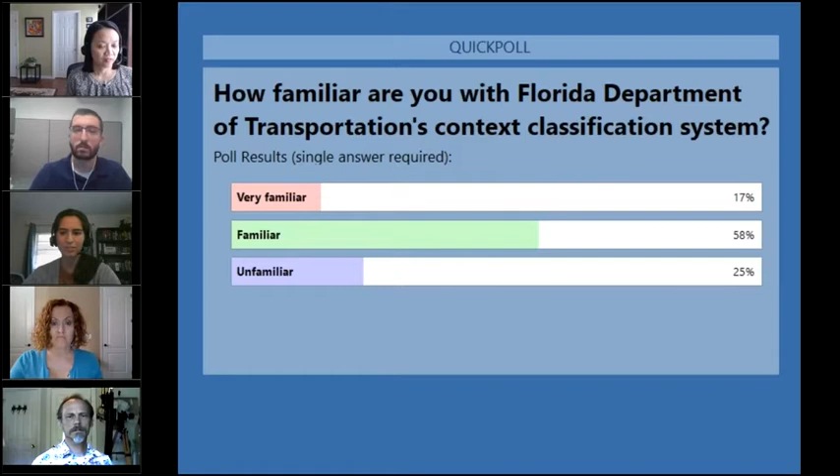Today, you'll be given an overview of FDOT's context classification system. You'll understand how FDOT assigns context classifications to roadways. You'll learn how context classification fits into other FDOT processes, and you'll hear about key context-based design principles that you can apply to your project work.

By the end of this webinar, we hope that you have a stronger understanding of the role that FDOT's context classification system plays in your day-to-day work. Remember that you will be quizzed at the end of today's webinar on 3 new context-based design principles that you learned.

To kick things off, Tina will talk about why we have embarked on the Complete Streets initiative and how context-based design relates to Complete Streets.

Okay, can everyone hear me?

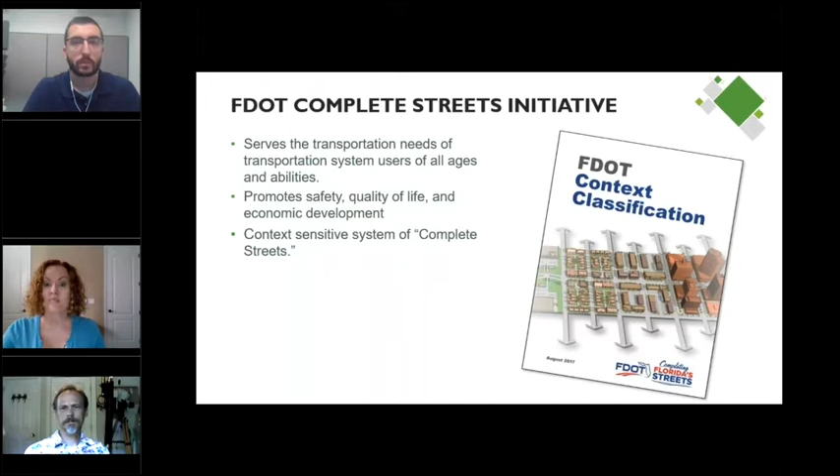Meaning, not all streets are the same, and each one should be designed based on its context. Roadway design should promote safety, quality of life, and align with the economic development goals of our partner agencies.

So now that we know why it is important, next we're going to look more in depth at FDOT's context classifications and briefly explain how we assign or review the classifications for each state road.

The context classification system includes all of the land areas and types found throughout the state of Florida. There are classifications ranging from the most natural wilderness settings to the most populated urbanized areas.

Both the context classification and the transportation characteristics of a roadway, such as the types of access it provides and types of trips it serves, inform us about the roadway users' expected demand and the potential challenges and opportunities users experience on the roadway.

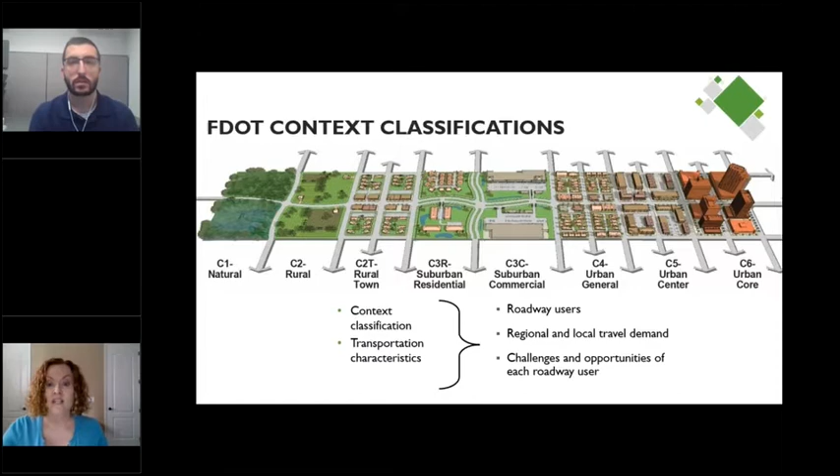For example, in the C6 Urban Core context classification, it is anticipated to have more pedestrians, bicyclists, and transit users than in a C2 Rural context classification, and the roadway design should reflect that.

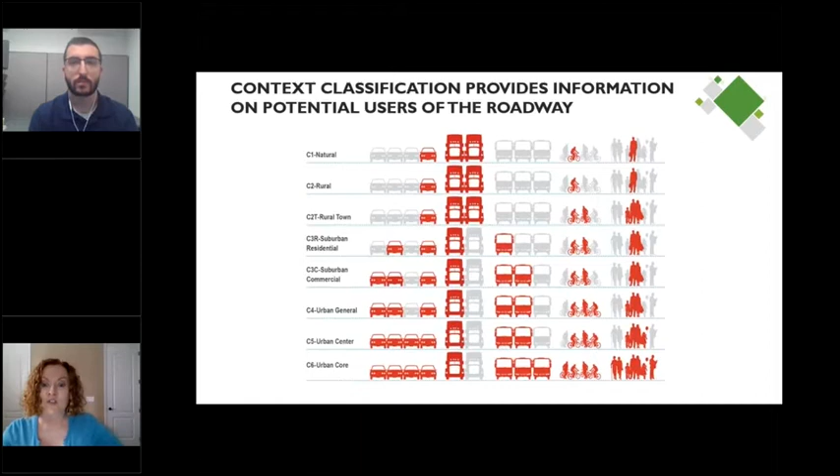Now I'm going to turn the presentation over to Steve Shams to explain the mechanics of how a classification is calculated.

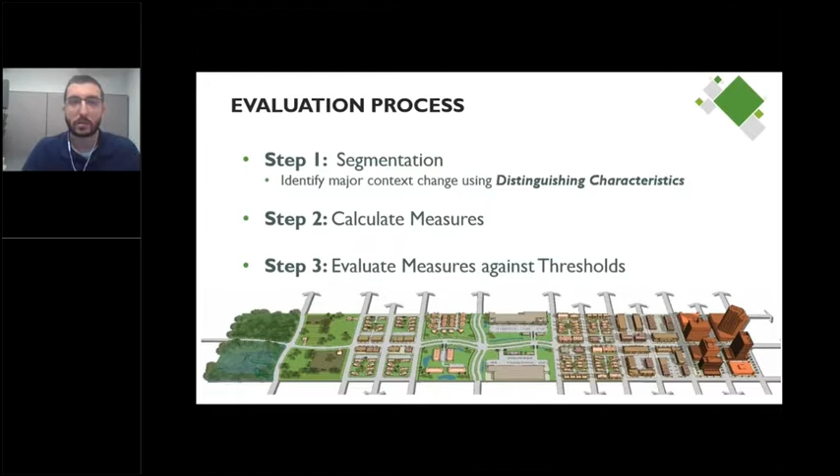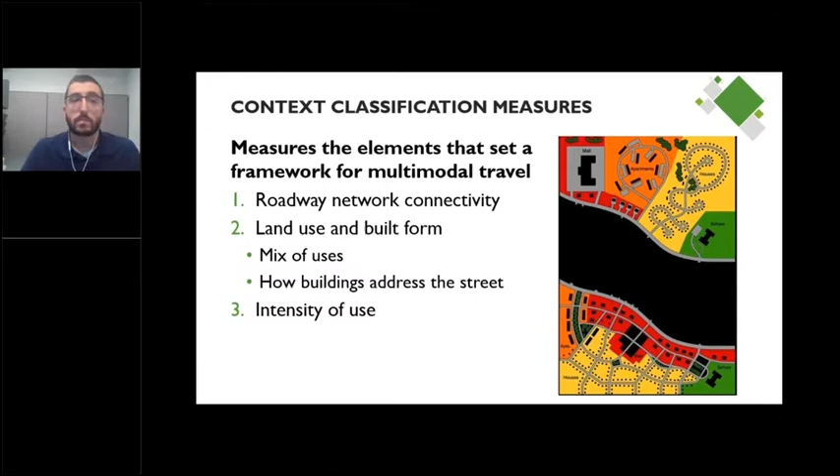So what are these evaluation measures? As Tina mentioned, these measures capture the typical characteristics that indicate the variation in development patterns. These are roadway network connectivity, land use and built form, and the intensity of land uses.

These measures are reflected in this matrix. Now, I'm not going to go over the matrix in detail, but I'd like to point out it is included in the context classification cheat sheet that was emailed in advance, and it is also located in the handouts tab of this webinar.

Each district has developed a district-wide existing context classification for all state roads. This GIS database is a preliminary designation developed through a GIS-driven process.

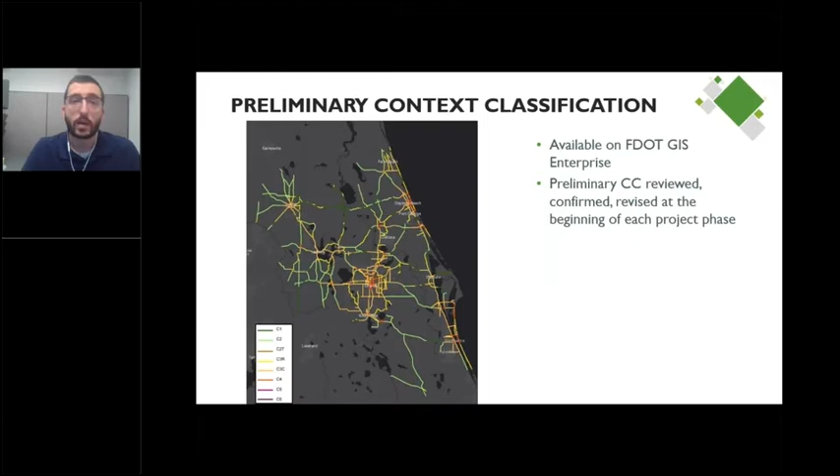Each roadway segment's preliminary classification is reviewed, confirmed, and revised at the beginning of each project phase by FDOT. Now, you might be wondering, what is the difference between an existing classification and a preliminary classification?

Existing context classification considers current conditions as well as permitted developments and program projects. Future context classifications consider all planned future conditions.

These designations are provided for qualifying projects or those that require efficient transportation decision-making, or ETDM, such as PD&E projects and larger projects that may require right-of-way.

The districts also have the discretion to use future context classification on any project they find appropriate.

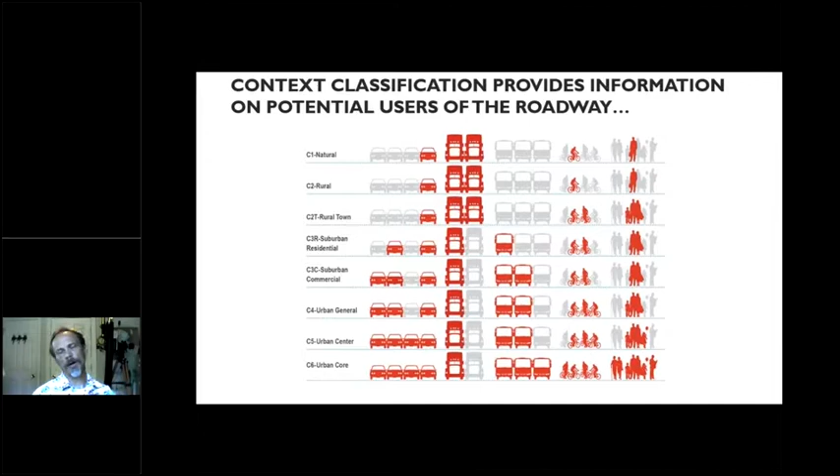Another way we use it, and Tina alluded to this earlier, is that we can tell right away once we've made a context classification designation what kinds of emphasis, modal emphasis, we're likely to have on the roadway and what we're looking for there. Knowing that can help us understand more about how the roadway needs to be designed. Next slide, please.

So here are three of the documents that have already begun to incorporate context classification. We're going to talk quite a bit today about the FDOT Design Manual. We'll also be touching on the Traffic Engineering Manual and the Access Management Guidebook.

Now, if you've never used these books, the FDOT Design Manual is what we use to design the roadway itself. Once the roadway is built, it's got to have traffic signals, pavement markings, intersections. Those things are dealt with in the Traffic Engineering Manual.

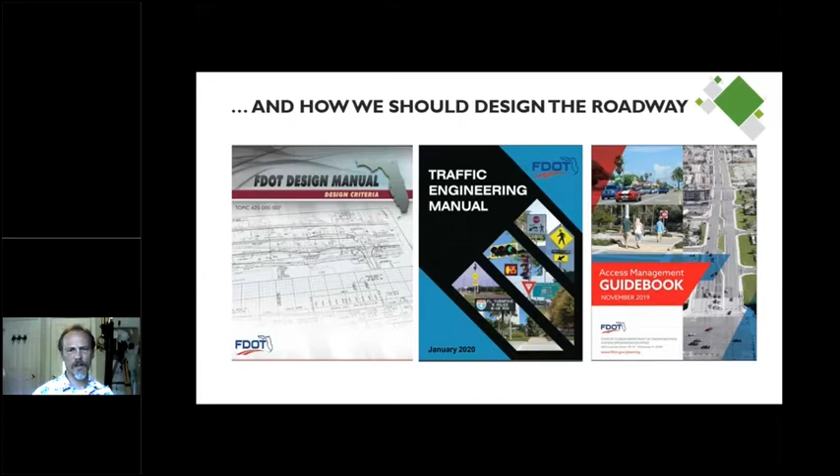And then we also may be looking at how the roadway interacts with things along the roadway, driveways, access to businesses and things like that. That's the Access Management Guidebook. So these are three of the documents that have begun to incorporate context classification in the way we're using it now at the department. Next slide. Okay, thank you.

So here's a little quiz. We're not using the quiz software, so this is one you can just do on your own. What you have here is a picture of four segments, four roadways, and I want you to look and see what the lanes look like, what it looks like along the edges, and assign in your own mind how fast you think these roadways are.

If somebody came to you and said, hey, I need a speed limit on each one of these roadways, what speed limit would you assign based on what you see there? So what do you think is the posted speed in this corridor? I'll give you a few seconds to think about that.

And here's a hint: these are all in the same corridor. Okay, next slide, let's see how we did. You can use the raise your hand function on your control panel if you guessed right for all these speed limits. And what you see is that they're all different speed limits, even though it's basically the same road as it goes through these different areas.

But what happened was in one area, it was a school zone, so the speed had to go down. Another area was still a school zone, had to go down even lower. In between, there may have been some transition areas. But the roadway stayed the same all the way through. And what we find is that drivers don't respond to that very well. They tend to drive the road the way it was designed. If you have to use signs to tell them how to slow down, it may not be as effective. Next slide, please.

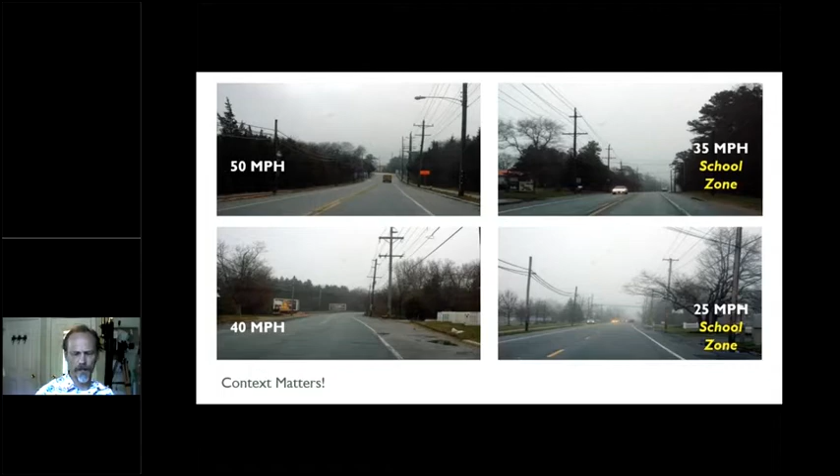When we put the FDOT Design Manual together using context classification, what we're doing is saying, well, for each of these context classifications, what are my different design criteria and how do they need to change? For instance, if you look at that top row that talks about allowable design speed, you'll see that based on the context you're in, certain speeds are open to you and others are not.

So if I'm in a C5 downtown condition, I'm not going to be designing 45, 55 mile an hour roads. On the other hand, if I'm out in the countryside in C1 and C2, that's where my high speed roads belong. By knowing where we are in space with the context classification, we can then assign the criteria that's going to make the most sense.

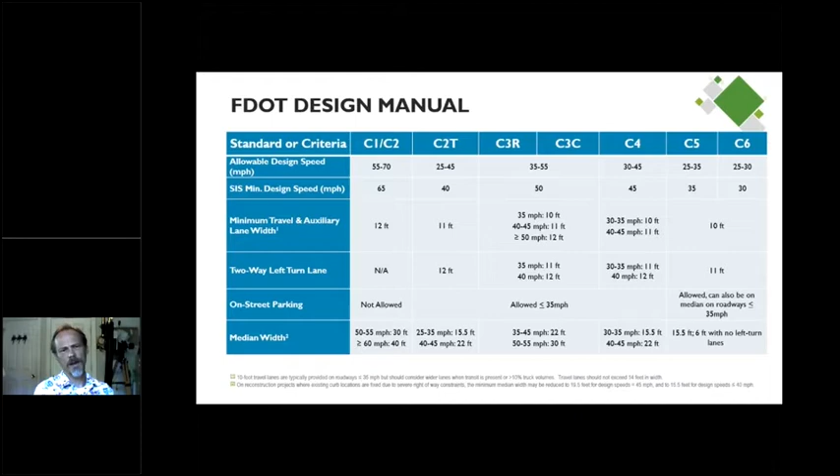You can see other criteria there as well, like lane widths and whether or not there's a left turn lane, whether or not we're expecting to see on-street parking. All these things are covered in the FDM and many more, based around context classification.

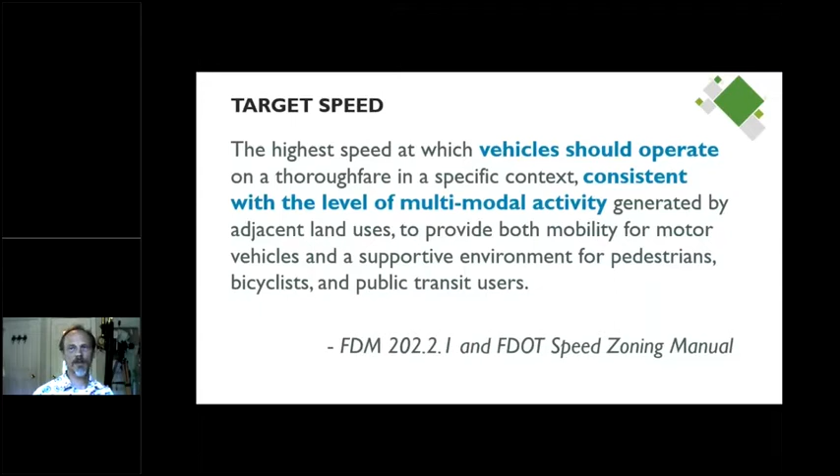One of the concepts we've been able to introduce is something called target speed. Basically, target speed is when everything is all said and done, if you took away the speed limit signs and just let people drive the way they wanted, how fast would we want them to be driving? What is the speed we want them operating at once the project is done? That's a function of how they interact with the land around them.

So in this slide, for instance, the left one, it says you're supposed to be driving at 35. Well, what's telling me it's 35? The road looks pretty open to me — I might feel more comfortable driving faster. So if we really want you to drive at 35, look at the slide on the right.

You can see we've introduced some curvature to the road. There are things to engage you along the side of the road — trees, and in other places maybe buildings. We need to make the roadway reflect the speed that we want you to be driving. That's the idea behind target speed.

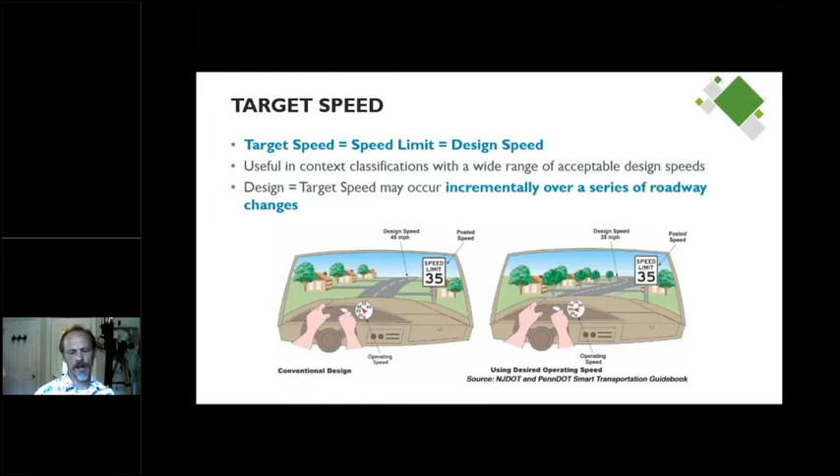We had a problem — I'm sure you remember that slide I showed a minute ago with the FDM criteria. In C4, our general urban context, we have a really wide range of design speeds between 30 and 45 miles an hour. That actually reflects the range of design speeds that exist today in Florida's general urban areas.

But where you would actually be within that range is a little tougher to tell. So one of the things we're introducing is target speed subranges to help you understand, if you're in a C4, how fast you should be driving. We have some different ideas here: for 30 miles an hour, or 35, or 40 to 45, there are different ways you might consider what that speed should be.

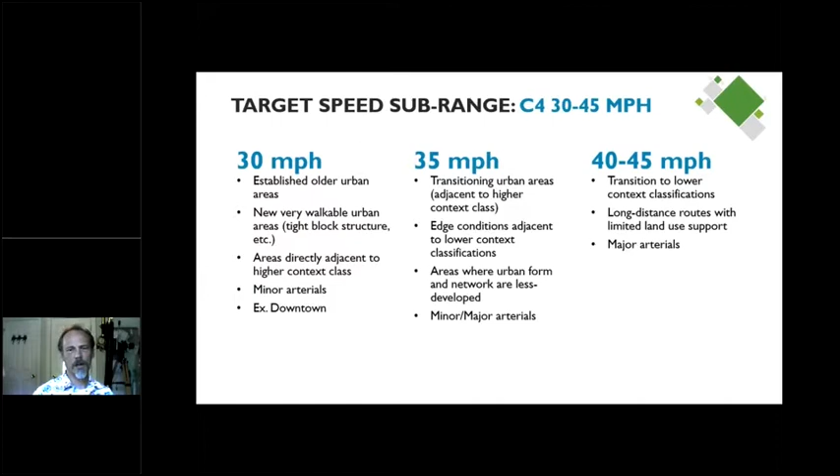The next slide shows that even a little better. Here are some questions we might ask when thinking about setting target speed on a roadway within this range of potential design speeds. What is the context classification? That's always a good place to start. What is the allowable design speed? That gives you the range. What's the access classification?

What's the transportation role of this particular roadway? Is this on the edge of town, just moving people in and out of downtown? Or is it actually in an old neighborhood with a lot of activity going on along it? How is this roadway functioning there? What are our priority users?

And finally, what does our safety data tell us about this roadway? Is it a roadway that perhaps needs to be slowed down a little bit, or one that's working fine with the speed it has? Next slide, please.

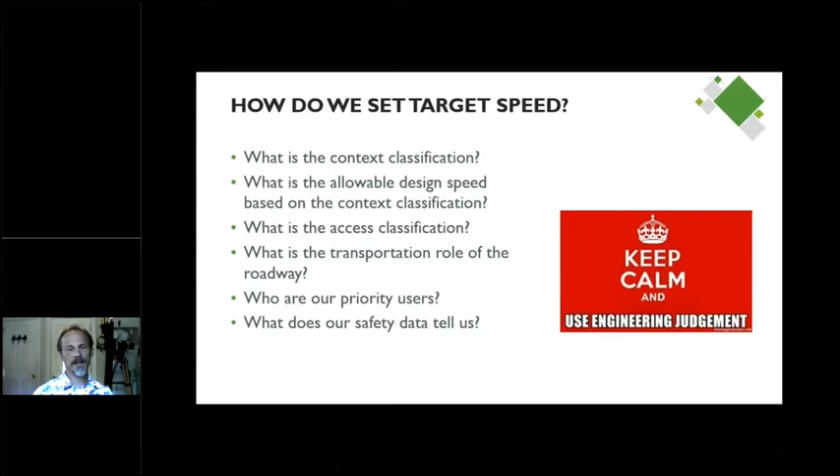So we have a chapter in the FDM, chapter 202, on speed management, and it has examples of different strategies you can use to achieve these different design speeds. One of the things we found when we created the FDM is that we had gotten really good over the last 100 years at building roads fast, but when it came time to build roads slow, we had to teach ourselves how to do that. So that's what FDM 202 is designed to do, to help us figure out what aspects of a roadway make it operate at a particular speed. That's what you'll see in this chapter, and there are some examples here on this slide.

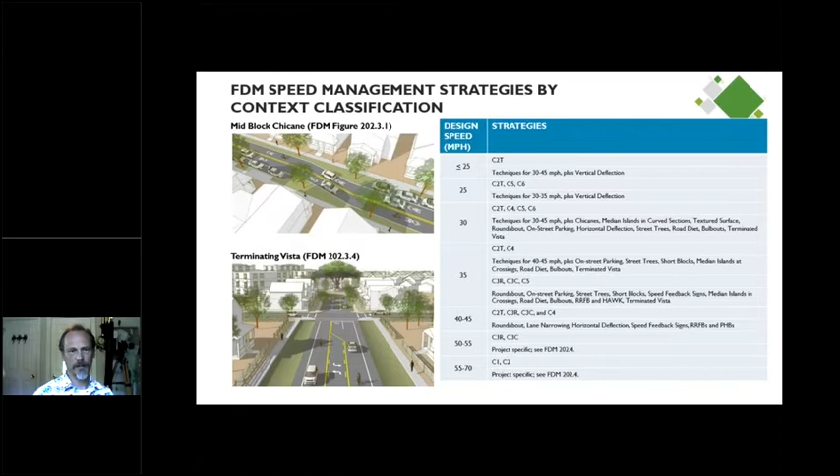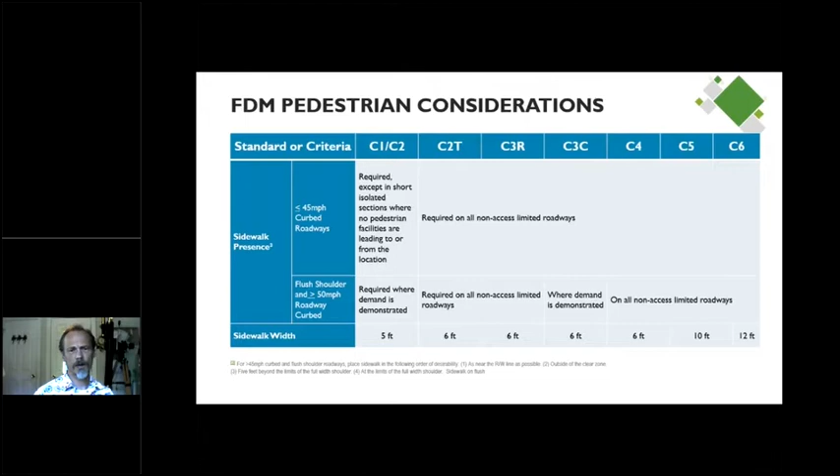One of the things we provide for in complete streets is pedestrians. We have a whole range of users, obviously, in complete streets. Within the FDM, pedestrian considerations are also broken out by context classification. We know that as our context class gets higher, from C1 to C6, we can expect to see more pedestrians on the roadway. So how is that reflected in our criteria? When you look at sidewalk width, you can see the width actually goes up, though it's not shown directly here — it's in a small footnote. In C4 and C5, there may be reason to go even to an 8-foot sidewalk if you expect more pedestrians, or if you have trees included along the sidewalk. So as the context class goes up, the sidewalk gets bigger.

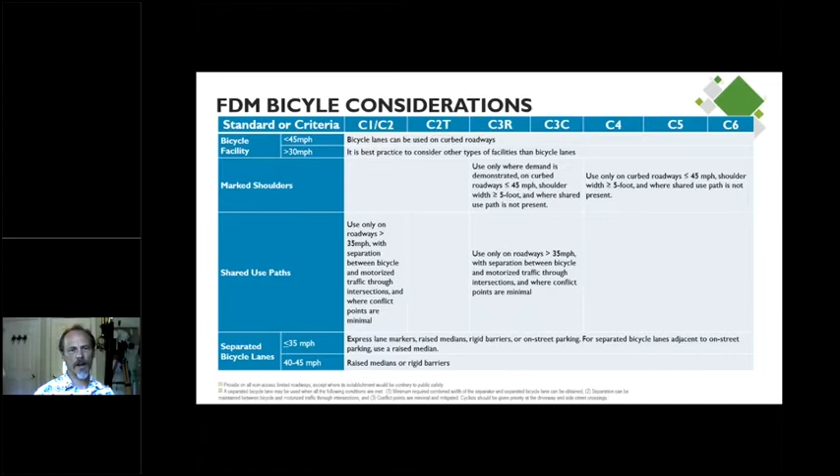For bicyclists, we have a similar set of criteria based on context classification. It's actually a lot more complex than this, and we'll talk about that later — how the bicycle criteria change based on context classification. Whether or not you can use a bike lane, or whether you want to try a shared use path, gets into speed, which is related to context class, so they all kind of blend together.

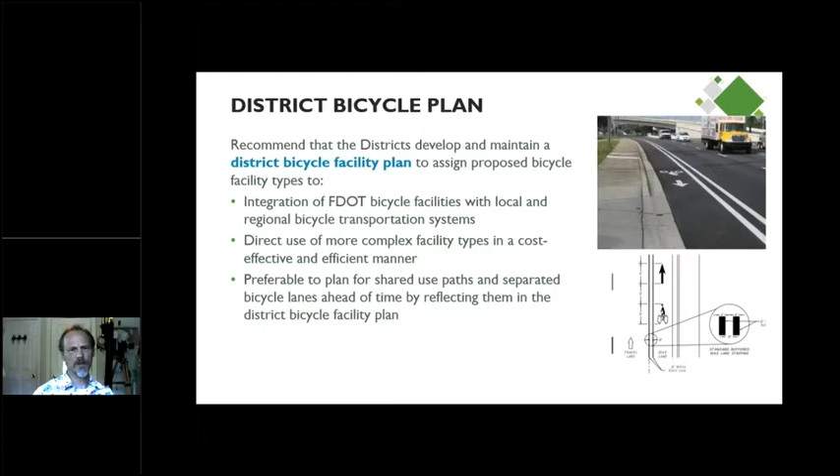If you're in an FDOT district, or even if you're not, you should be aware of one thing we introduced last year: the concept of a district bicycle plan. It's not a requirement, but it's strongly recommended given the complexity and expense of the new bike facilities being introduced at the national level and by FDOT. We need to plan for them better than we have — we can't just say it's going to be a bike lane and call it good. So we're recommending districts prepare a district bicycle facilities plan to help figure out where these more complex types of bike facilities would go.

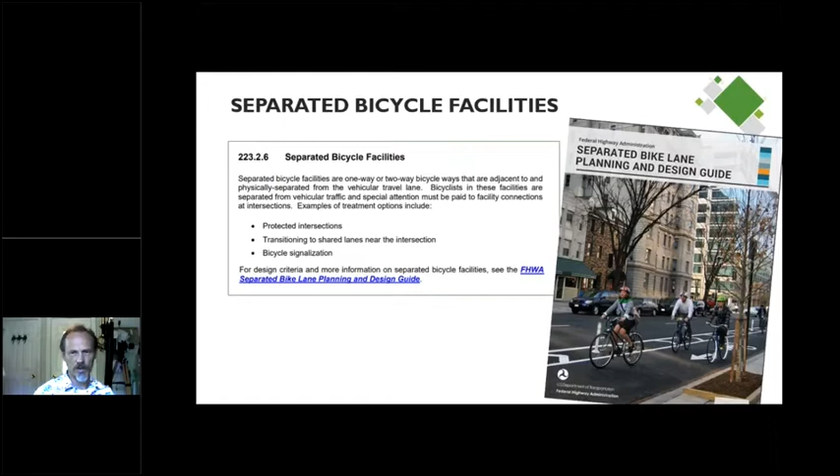A good example is these separated bicycle facilities you see here — this is from the FHWA guide that came out a few years ago. We took this information, which is fairly broad, and last year pulled out the pieces we knew were a slam dunk on the state roadway system and put them in the FDM. There may still be things in the guide you'd like to use that aren't in the FDM — that doesn't necessarily mean you can't use them, it just means we need to talk about it first. But the stuff we knew we could use right away, we put in the FDM. You can go out and use it tomorrow. So that's the good thing about that.

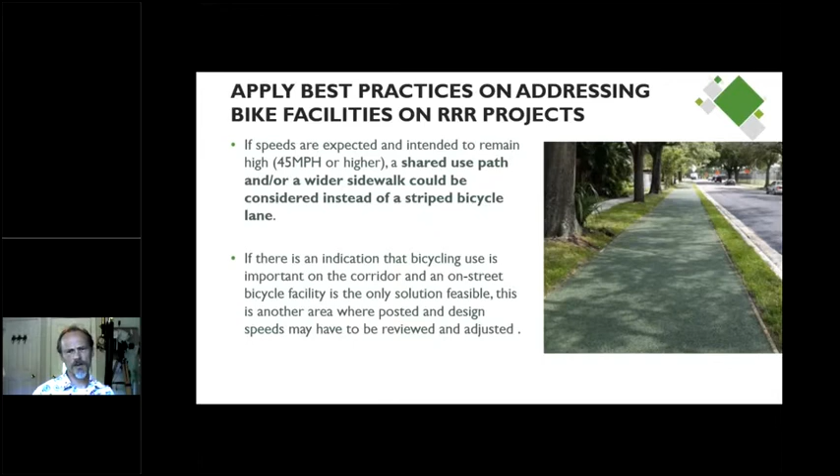Another thing we did last year was make it possible to take some of the bike lane space, which a lot of folks are finding isn't used very much, and put that space into a shared use path within the FDOT right of way. So where we would have had a bike lane and a sidewalk next to each other, we can now combine that into this shared use path. Here's an example of where you might do something like that. It's mostly intended for our higher speed, more suburban type facilities, but there are other places you might be able to do that.

Just to touch briefly on some of the other manuals that we have incorporated context classification. Here's an example of one for the FDOT Traffic Engineering Manual. This was something that changed just in the past year.

When you want to install a marked crosswalk at a mid-block location, or even at an intersection, it used to be that there was a pedestrian volume that you had to account for before you could even go through the analysis process. What we've done now is said, well, we know that if we're in C2T, C4, C5, or C6, we know that we're going to have a lot of pedestrians there. So if the speeds are already low enough, 35 or less, we don't need to worry so much about that pedestrian volume.

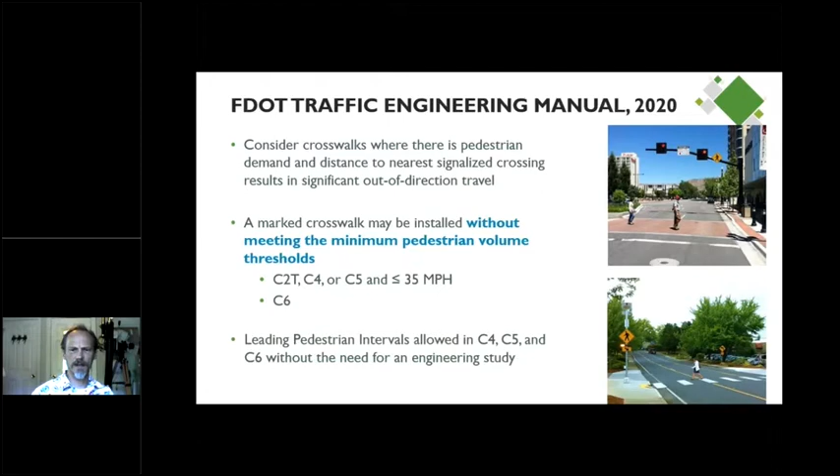Let's just go ahead and assume that they're there. You have to do the rest of the analysis, but based on context classification, you can just answer that pedestrian volume requirement and go ahead and proceed with the analysis to see if it will work just based on the other parameters. Another example is leading pedestrian interval, which is also allowed in certain context classifications.

The access management guide was updated last year. It also has information in there on modal emphasis. So you decide as you're doing access management, if you're doing it more for trucks or more for pedestrians or more for transit, it will affect what kind of access management tools you use. And so we've now incorporated context classification in there as well.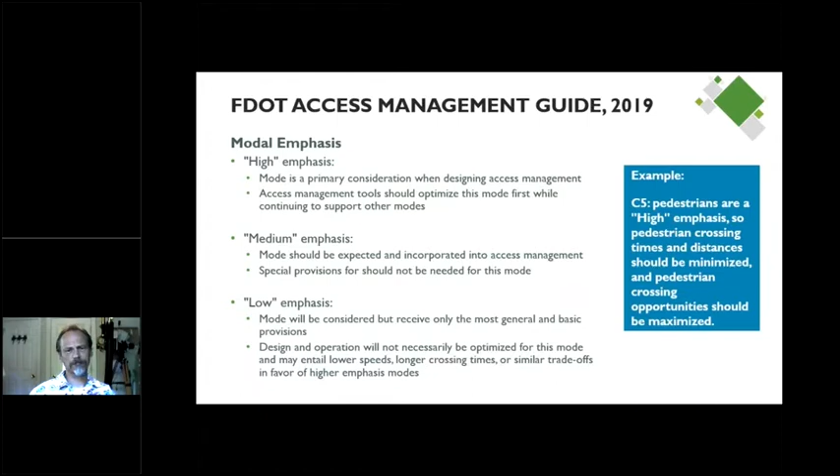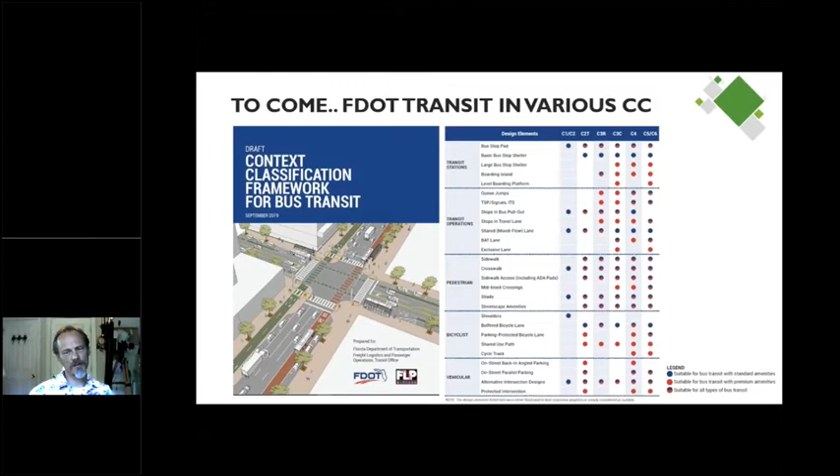And still to come, this is in the works, an FDOT transit-based framework for context classification for transit. And again, based on where you are in space on your context classification, it'll help you figure out what kinds of transit facilities might or might not be appropriate in those locations.

Okay. And that gets us down to our next speaker. Great. Thanks, Dwayne. Hello, everyone. My name is Jane Lim Yap. I'm with Kittelson & Associates.

So we're going to zoom out a little bit and talk about some higher level principles now that you've seen the policies and regulations and standards that are reflective of context-based design. It's good to really just understand the principles behind this also. Main objective of today's webinar is to deepen our understanding on this principle. So spoiler alert, we will ask you at the end of this webinar on these principles. So as you go through it, you can listen for these principles.

So we wanted to talk about our land use and transportation story, as this is key to complete streets. We are excited today to see the participation from both our land use and transportation partners. And so it is a story that really is part of a lot of the evolution of our communities.

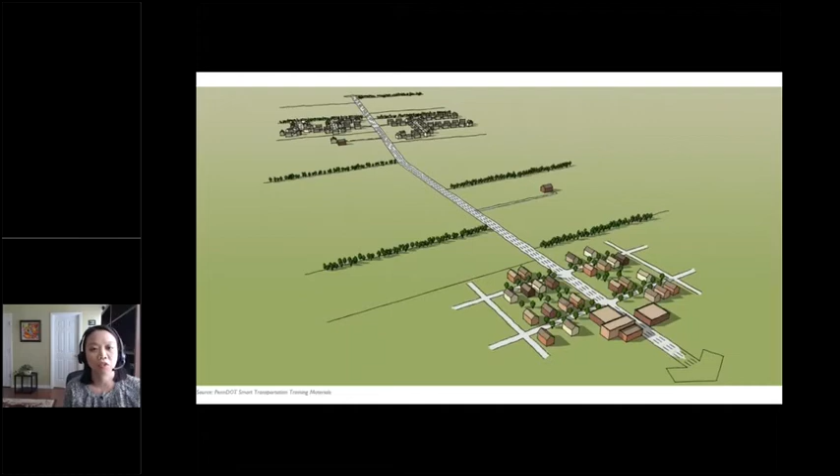The story usually starts with this typical cycle, which is here we have a historic village on the lower right, surrounded by farmlands on a 2-lane roadway. A couple of farmers could apply for rezoning and redevelop their farmlands into residential subdivisions. As this happens, the commute between the village area and the new subdivision would lead to higher levels of volume and potentially some congestion on the state roadway.

So DOT is called and asked to come and widen the roadway to accommodate this new traffic. After the road is widened, land values along the roadway would increase. A couple more farmers now go and ask for rezoning to potentially commercial land uses. And you'll hear this argument of, DOT just invested in this roadway, we would like to take advantage of this investment by increasing our tax base and converting our ag lands to commercial development. Now the level of congestion is going to further increase, and DOT has to widen the road again.

And notice that the historic village now, it may not be as quaint anymore with the context changes around it. So the remaining farmers probably now have a huge economic incentive to sell their land for development. The land values are too high because of access to this 6-lane roadway, and for it to continue as agriculture probably doesn't make too much sense for them.

So at the end, we eventually hit this cycle, and this is the road we have. This is familiar to many of us. We see it everywhere. All of the land uses and development rely on the state arterial for access and mobility, short or long trips, and no parallel roadways were built. We see it everywhere, but this particular example is in Burlington County, New Jersey.

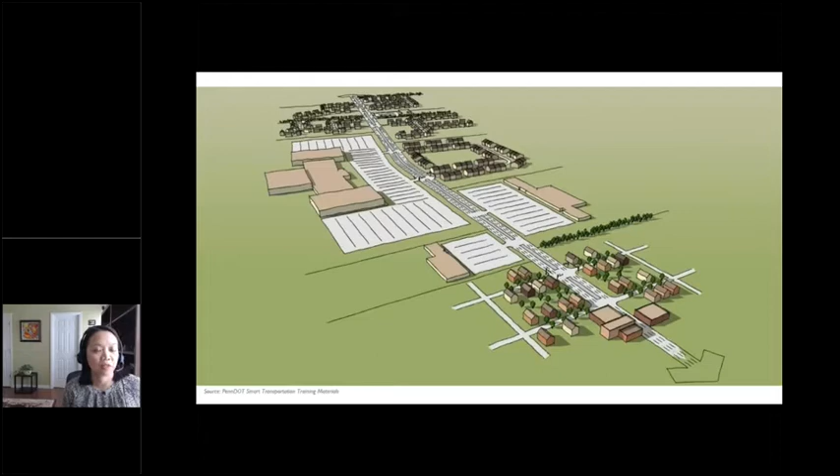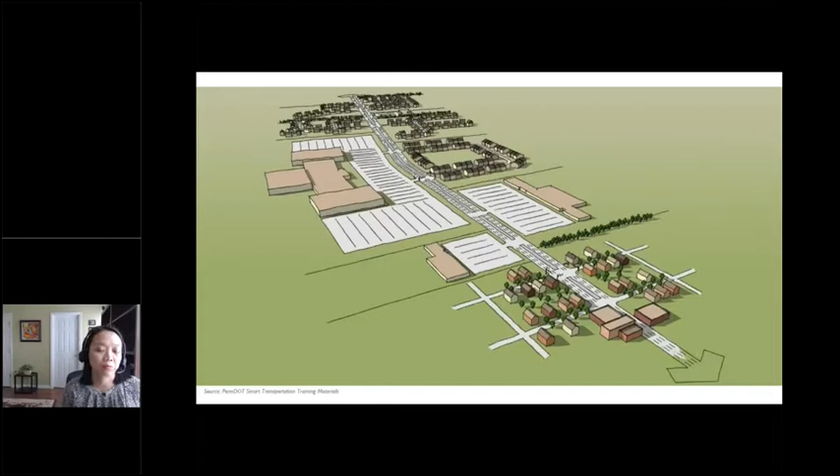And land use is also part of the solution. So perhaps we extend the idea of the village concept with some mix of land uses, some variations in density and infill development. And this would obviously require serious land use guidelines and potentially some policy changes, as well as commitment from various partners, including landowners.

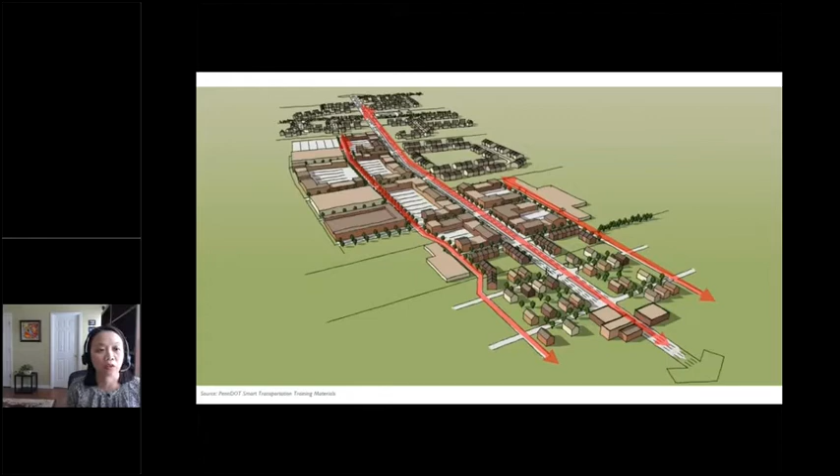So Complete Streets is about putting the right street in the right place, but it is also about putting the right place to frame the right street. This is the first tenet of Complete Streets: it's not just about transportation, but it is about land use and transportation together.

The second tenet of Complete Streets is about building a system of streets, going from complete streets to thinking about complete networks to complete communities. DOT and our partners can work together to build a system of context-sensitive streets. The roadways that DOT owns or has jurisdiction over, which DOT can directly redesign, are part of a broader network of state and local roadways. So no single street can perfectly meet the needs of every user, but over a network of complete streets, the effective network can serve the needs of all users in the community.

Speaking of addressing needs for all users, it would be good to ask, who are these users that we're talking about? Context-based design asks us to consider the design user, and it varies based on the mode and by the age and ability. If we design for the most vulnerable among the users, we will likely be able to cater to most of the other less vulnerable users. And as all trips start and end with walking or bicycling, I'd like to cover in the next series of slides some context-based design principles that are specific to walking and bicycling.

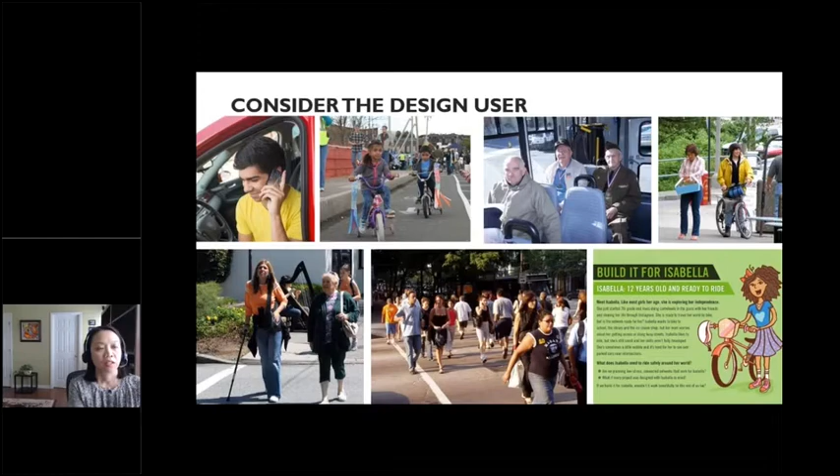So first, what are the fundamental needs for all users? No matter the mode, the fundamental needs for all users include being safe along the trip, feeling safe, and being able to complete their entire trip safely and comfortably. The design elements that help meet these fundamental needs vary based on the design user. For instance, people walking and bicycling are sensitive to the details of the environment, including detours, lighting, pavement surface quality, and more. Transit users do not just experience the transit vehicle itself or being inside the bus; we also experience conditions at the transit station and, of course, the last mile connection to our final destinations.

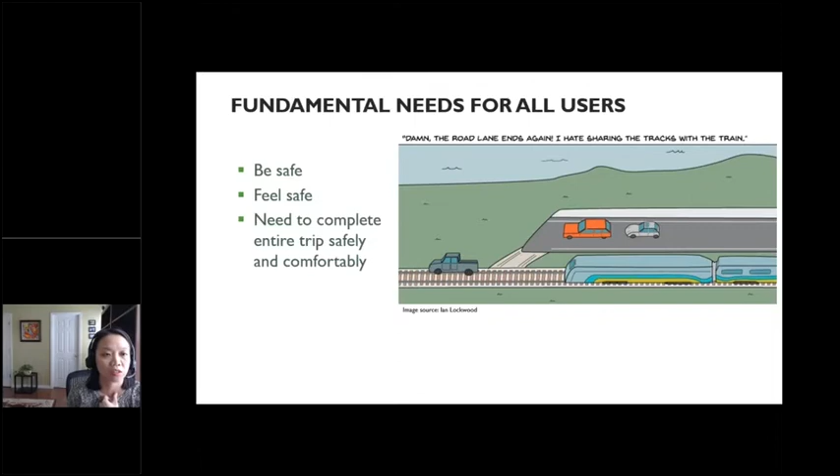So why are walking and bicycling trips so important? Because they're so significant, we can really move the needle if we can influence these trips. It turns out that many of our trips, up to 78% of them, are less than 3 miles and could actually be completed by walking or bicycling if you just think about the distance. But this is not happening, and the reason is the right infrastructure is not consistently available to support this travel. So today, although 78% of our trips are 3 miles or less, 70% of those, a subset which are the 1 mile or less trips, are actually made by driving.

So when we talk about designing the right infrastructure, what makes a comfortable street? Designing for pedestrians doesn't end at the curb or even at the sidewalk. Pedestrian infrastructure that makes a walkable street includes wide sidewalks, typically buffered from the roadway. If the street is in a retail area, a zone for dining or outdoor retailing may be there. There's a lot of elements beyond just the pavement or the sidewalk itself that really contribute to the walkability of a roadway. Again, this depends on the context, and in a commercial retail area context, some C4, C5, C6 environment, this would be appropriate.

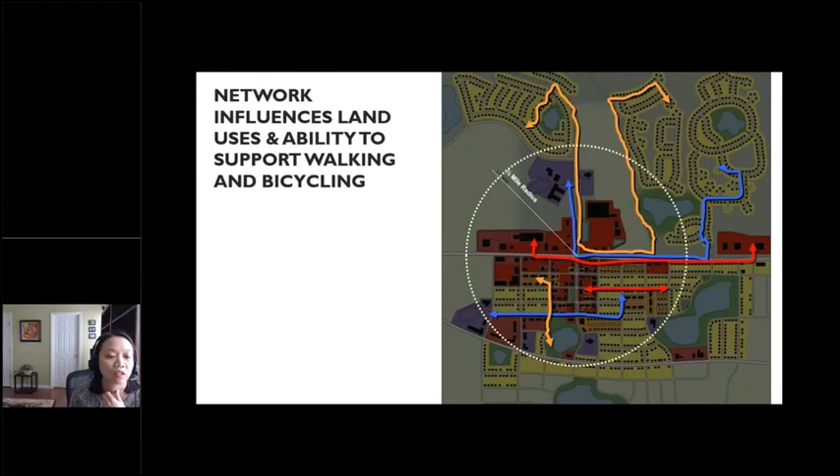The street network on the south side is characterized by shorter connected blocks and diverse land uses. This translates to what trips could occur. Trips between land uses on the south side could be much shorter and more efficient for traveling by all modes, including walking. This circle shows the half-mile radius in an area, and you can see the greater reach of land uses that could be effectively reached by those shorter trips, versus a different pattern and network situation on the north side.

So if we have our land uses set up right, and we have the network of streets, what other barriers could hinder a place from being walkable? Again, we'd like to engage you on a polling question. What do you think is the top challenge of walkability?

Most of you answered presence or absence of pedestrian facilities as a barrier to walkability. Second top answer is vehicle speed, and vehicle volume and presence or absence of street trees were also good answers.

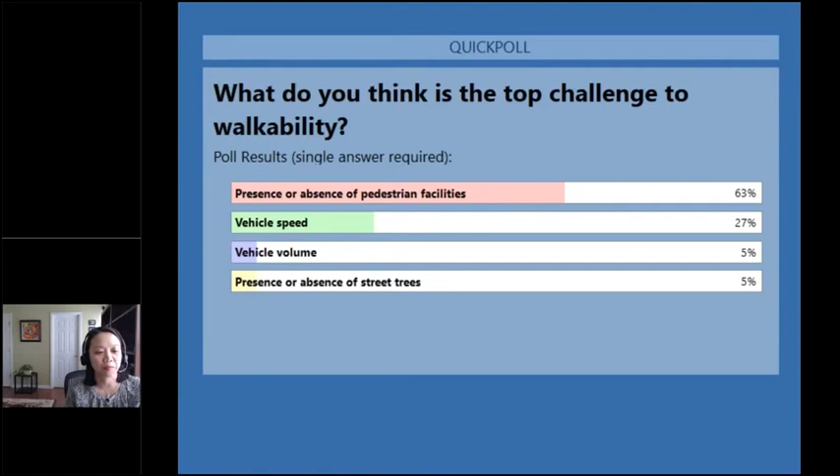We think vehicle speed is definitely an influence on walkability. Why? It's mostly a matter of physics - force equals mass times acceleration - so the faster the speed, the bigger the impact and risk to pedestrians. For instance, the likelihood that a pedestrian could survive being struck by a vehicle decreases dramatically if the vehicle is traveling at a higher speed.

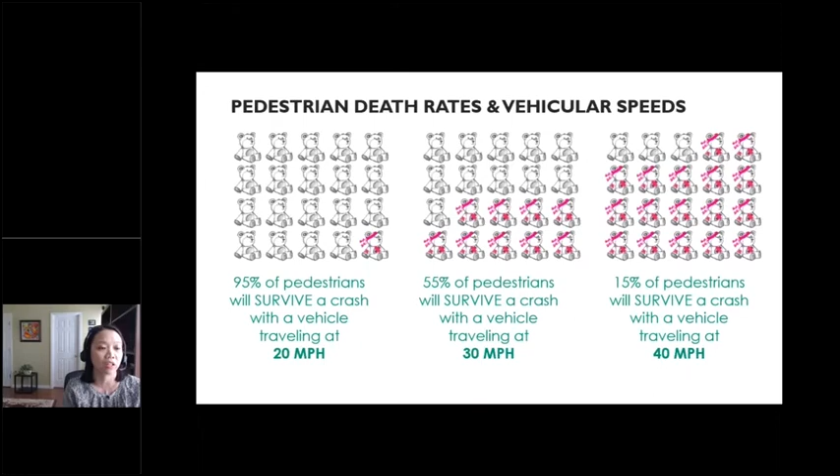Second top challenge to walkability - guess what? We think it's also vehicle speed. Why? If we have our land uses set up right and a network of streets, at lower speeds, say 15 to 20 miles per hour, drivers are better able to assess their surroundings and identify pedestrians and land uses along the roadway. When traveling faster, this idea of the driver's cone of vision means they're focusing on a farther distance and likely not on areas around them. So a pedestrian walking in front of you isn't something one would focus on when traveling at a faster speed.

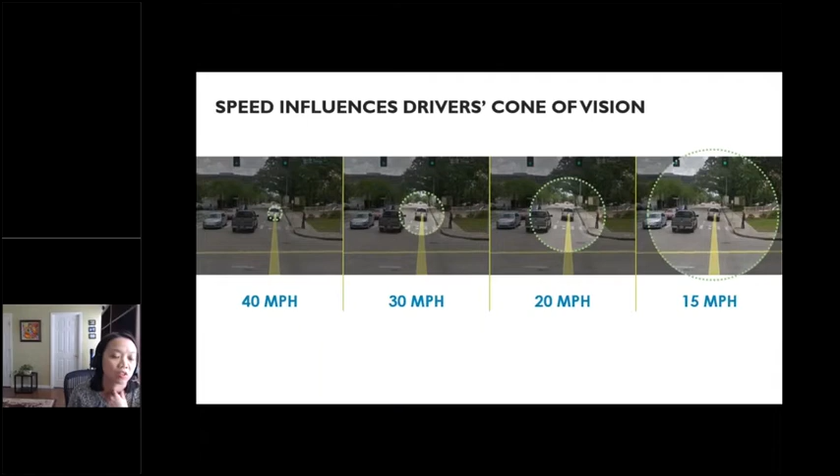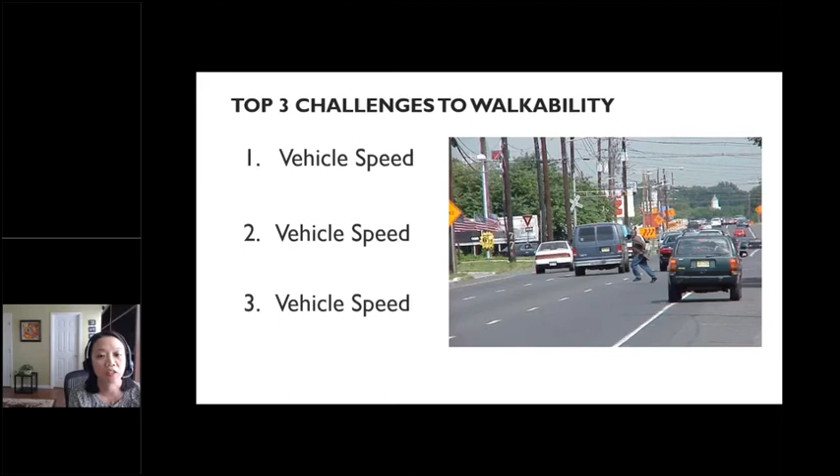So what else is a challenge to walkability? If you guess vehicle speed, that's right again. Vehicle speed of a roadway influences the land use and transportation relationship we talked about earlier - it influences the type of land uses encouraged along a roadway. Faster speeds, because of that cone of vision, will likely encourage destinations set back farther from the street, since drivers have a narrower cone of vision and are focusing on a smaller area. So you get single-use development set back from the street, meaning land uses that would actually be a destination for walking won't likely be present on a roadway with fast speeds. It comes back to that connection between land use and speed.

But there is one more challenge to walkability, aside from everything you all said already. The fourth one, we think, is roadway width. We know that speed-related challenges to walkability increase as roadway width increases, and we need to think about walking along the corridor. But since all of our trips require us to cross the street, we should also recognize the permeability, or crossability, of a corridor as an important factor.

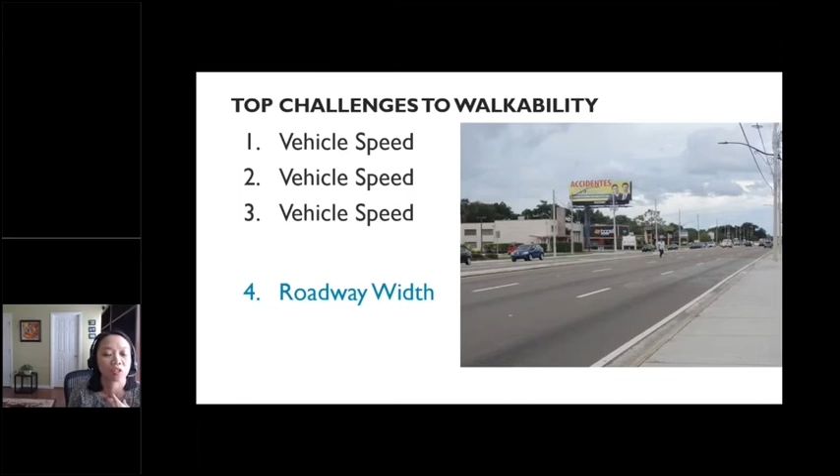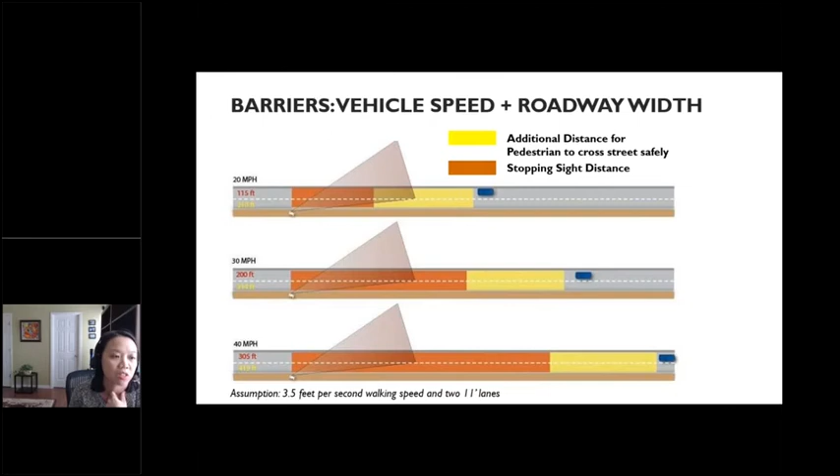So now I'd like to turn it over to Stephen to share more about context-based design, about how these principles could be applied, and examples of how we've applied these principles to some recent FDOT projects. Perfect. Afternoon, everybody.

Along with considering the speed and width of roadways, it's also important to pay close attention to areas where we have high potential for conflicts, like at intersections, where vehicles and pedestrians come together in one singular location. This is where we see the highest incidence of pedestrian and cyclist injuries. So intersection designs that follow the five principles we have on the screen here provide a safer and more comfortable environment for roadway users.

Moving from left to right, we want to make sure our intersections are as compact as possible. A lot of times people think they need large intersections to move a large amount of vehicles or larger size vehicles, and that's not always true. There are ways we can really shrink down those intersection types and introduce new elements to at least make them appear smaller. That's really going to help us manage speeds and remove excessive space that's not necessarily needed, which could lead to driver error.

Then in urban context classifications, intersections exist in a grid. So if one intersection is congested, we need to make sure people are seeking alternative circulation in the network before simply widening out or improving that intersection.

And then integrating time and space. Signal retiming offers a lot of opportunities to minimize wait time for everyone using the signal, whether you're doing shorter signal cycles, shorter crossings, or shared green times. We have a lot of options when we start integrating these signals with each other.

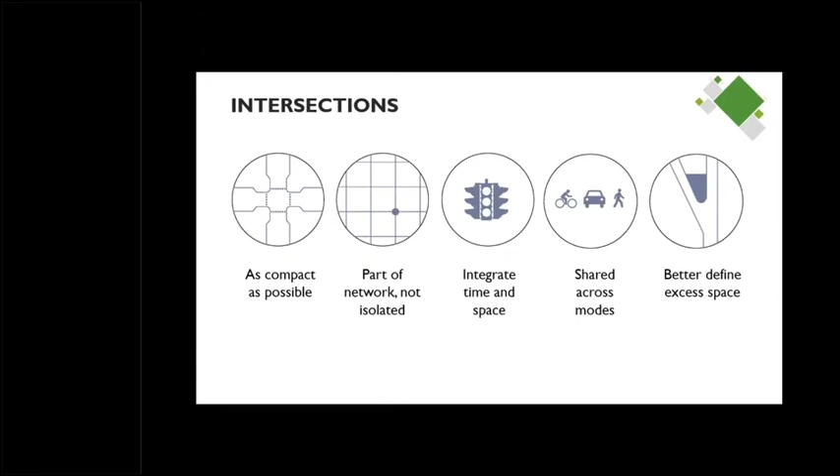And then one of my favorites is actually better defining the excess space. There's a lot of extra room you don't always realize is extra room out there, and that's something we're going to explore here in just a few minutes. Recognizing that is the first step—that this space doesn't actually need to be here, and it's going to widen my view shed and make me feel as a driver that I could drive faster through this intersection than I really need to be and than I should be.

So next we're going to move on to design vehicle versus control vehicle. This is really one of the most exciting things that have come out of the Complete Streets initiative, at least for me as an engineer. A design vehicle is someone who is a frequent user of a given street—on a daily basis, we're driving through this particular intersection or street. It's going to dictate the minimum turning radius.

So if I want to make a turn at an intersection, I need to make sure my design vehicle can make that turn from the lane they're driving in into the immediate turn lane. I should be able to turn into the receiving lane that's nearest to me.

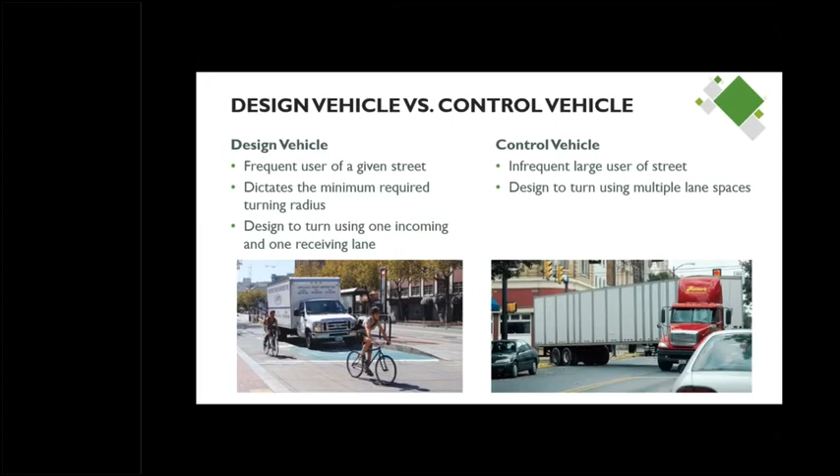A control vehicle, though, doesn't necessarily need to turn into the nearest lane. If it's a 4-lane road you're turning onto, maybe they go into the inside lane a little bit to make that turn. Maybe what you're able to do is like this truck you're seeing here on the right-hand side—maybe you enter the opposing lanes. The important thing to remember with a control vehicle is it's a vehicle that may be visiting or making this turn once or twice a day. There's a different threshold depending on the site-specific constraints and what your origin-destination points are for that control vehicle, so it's just some of those things you need to keep in mind. This is the outcome, though—what you're seeing right here, this curb radius.

So the lighter concrete that you're seeing, that's the concrete that we were able to add to this intersection because we actually designed it for the control vehicle and a smaller design vehicle. So we were able to really shrink up the radial return. That leads to slower turning vehicle speeds. It significantly reduces the crossing distance for pedestrians, and it's going to add to the visibility of the pedestrians.

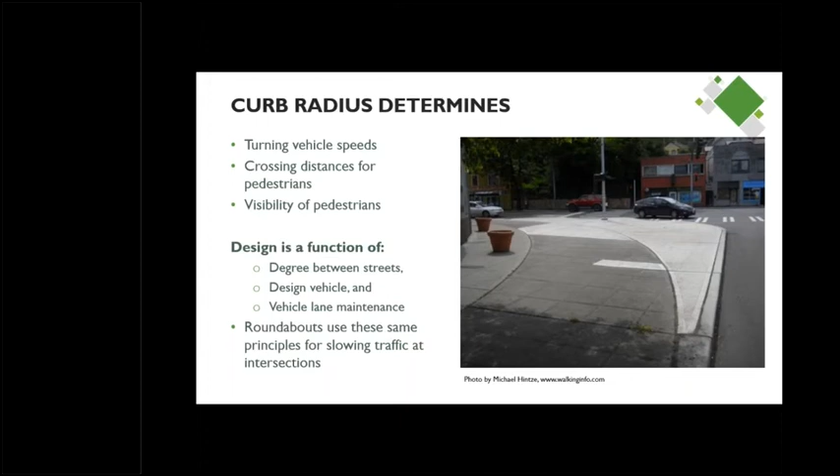So if you'll go to the next slide, the image on the right talks about visibility of the pedestrians. With these bump outs that we've provided and really tightened up that radial return that you're seeing there, you're moving the pedestrian, in this case, about 10 to 12 feet further out into the view shed of the oncoming cars. If you can imagine where that gray car is parked right now, if that was a big box truck, the cars coming at you on the page, they wouldn't necessarily see a pedestrian, right?

If they were back further where the sign is. Now that we've moved them out, there's a lot easier line of sight for them to be able to see, recognize that pedestrian. They should be coming to a stop anyways, but hopefully make sure they definitely come to a stop, recognize and yield to that pedestrian.

The image on the left is showing what you can do for compact intersections and making sure you add that space. All of this originally was just, I believe, gored out pavement. We added in the curbing, added in the landscaping that you see there and the extra tables, and it's almost like a pop-up event kind of approach. But that's something where you address that excess space, and you add these features. It's going to reduce the speeds through this area. I wouldn't drive that fast next to that raised planter, at least.

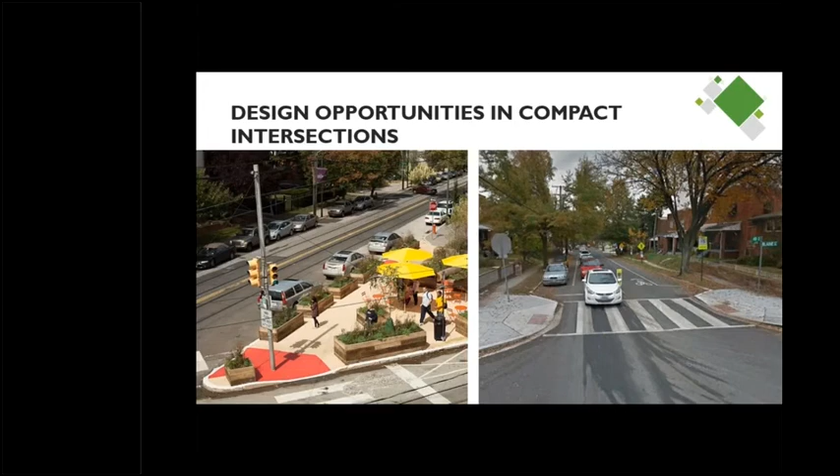So there's a range of other treatments and tools that can be used to improve walkability at intersections, including traffic operation solutions. These include locating crosswalks appropriately and adding lighting appropriate for non-motorized modes, facilitating two-stage roadway crossings with pedestrian median islands, right? Emphasizing crossings with overhead and in-street signs, facilitating user-actuated crossings with hybrid beacons, giving non-motorized users a head start at intersections with leading pedestrian intervals.

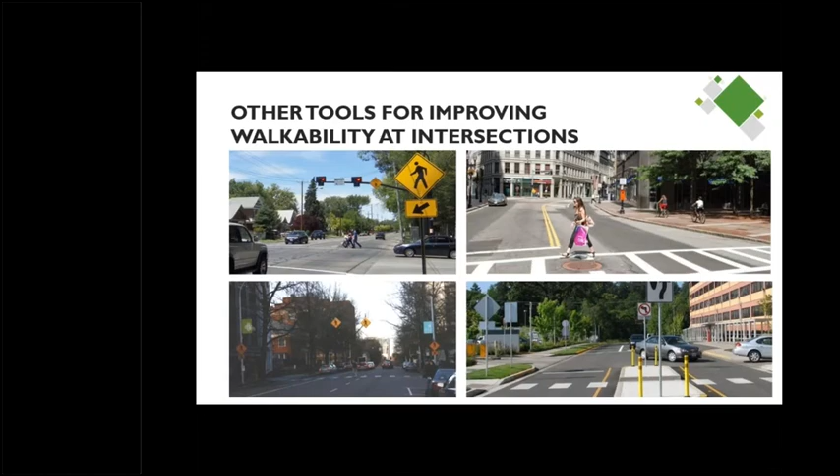And with leading pedestrian intervals, it used to be where you had to have a study if you wanted to add that to a signal operation. That's no longer the case. If you're in a C4, C5, or C6 context, we're able to add that in there without a study.

So this is a perfect example of how big intersections can work for everyone. This is a large intersection that has a lot of features that have been added to it to reduce your view shed and make it a lot more friendly for all modes of traffic.

So we're going to do an interactive activity. It shows, again, an example of a large intersection that's been modified, right? Take a couple of minutes and try to see if you can find 3 design elements that make this big intersection work for all roadway users.

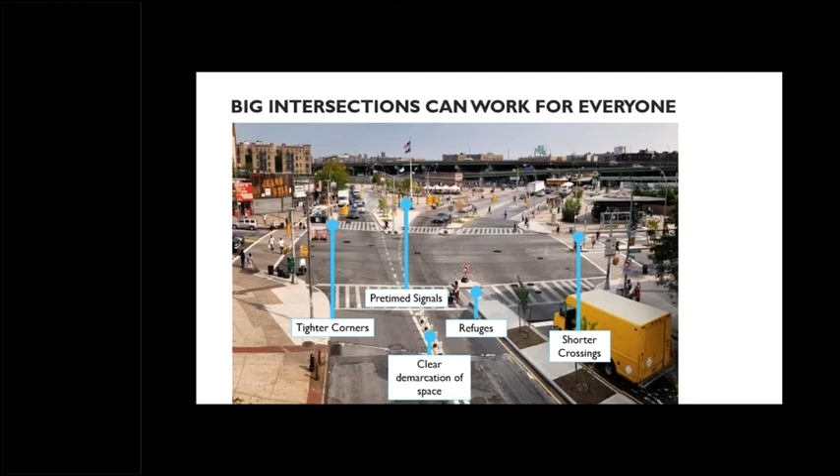You can see here that we've reduced the radial returns. You can see that where it says tighter corners there. We pre-time the signals. They have clear demarcation of space, right? We have in that case, that's almost like a hardened center line that's shown right there. That's making it very clear where people should and should not be. We have the refuge islands there for pedestrians who are crossing the roadway, and we've created shorter crossings by integrating all of these things together.

So in addition to designing streets to foster short walking trips, FDOT can redesign streets to encourage slightly longer trips that are occurring in our daily lives to be made by bicycling.

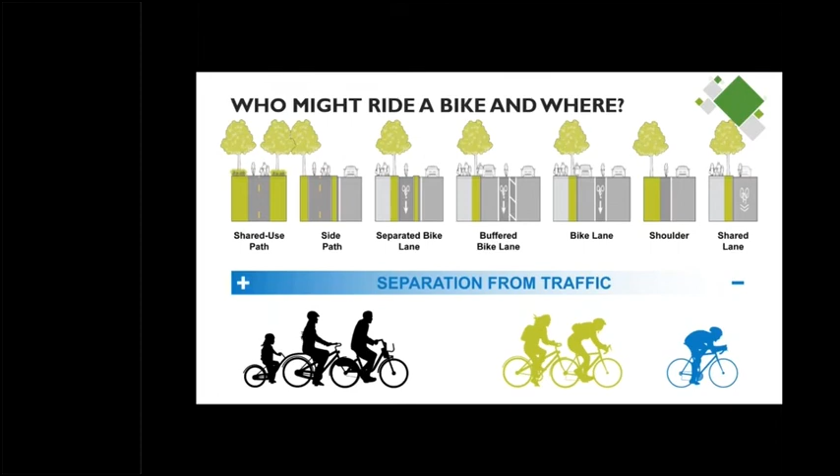So today, almost 70% of people are interested in riding a bike. However, the majority do not choose to bike for transportation because different types of cyclists have different needs and perceptions, right? So an increasing proportion of potential cyclists will feel safe and comfortable biking as the amount of separation from traffic increases. And that's kind of shown in this graph here that you're seeing. The more separation that you have from the traffic, the more likely you are to see a different use of a different group of cyclists.

So remember, the fundamental needs of all transportation users includes feeling safe, being safe, and being able to complete an entire trip from start to finish safely and comfortably. For cyclists, the design of bike facilities strongly influence their perceptions of the safety and comfort of cycling, right? So for instance, the largest user group in the 4 categories of cyclists, the interested but concerned group, they actually prefer separated bike lanes.

As outlined in the upcoming revisions to the AASHTO Guide for Development of Bike Facilities, if you have a facility on a higher speed and higher volume street, you're going to need a greater level of separation and protection in order for those cyclists to feel safe, be safe, and be able to complete the trip comfortably, to meet those metrics.

So when thinking about implementing a bike lane within your existing right-of-way, consider opportunities to implement buffered bicycle lanes. In addition to increasing the passing distance between vehicles and cyclists, they offer other safety benefits.

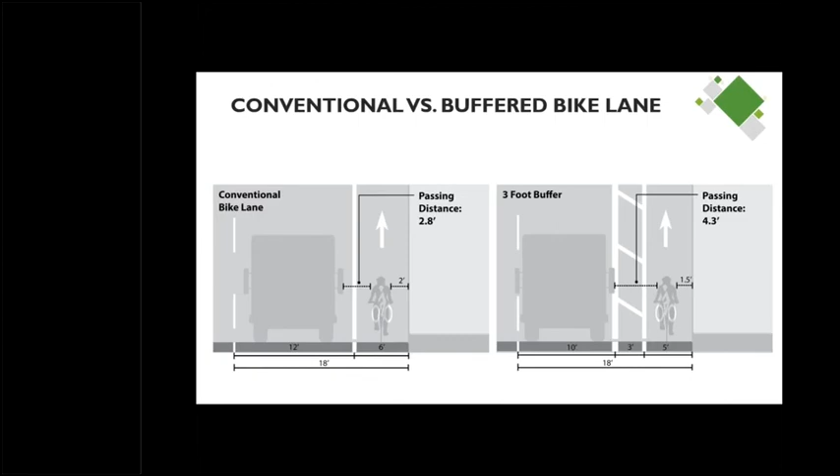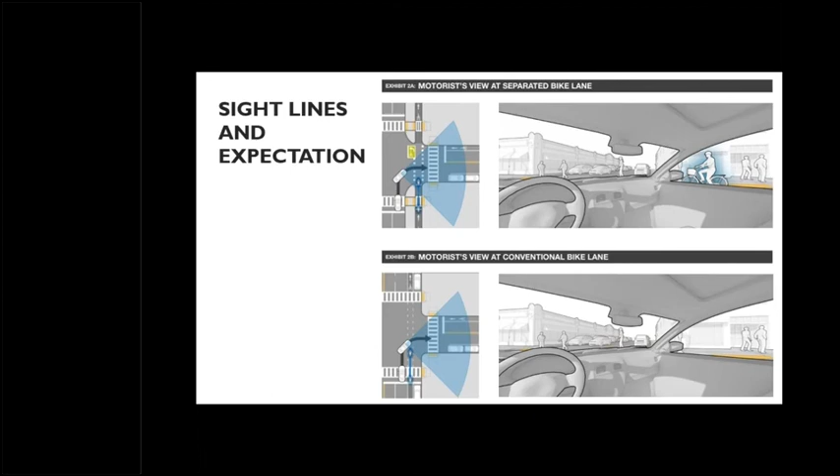So at intersections that permit right turn on red, at driveways, anywhere you have complex signal operations in place—basically everywhere you're making a turn—you're going to have that sight line be a key factor in making sure the cyclist is seen by the driver.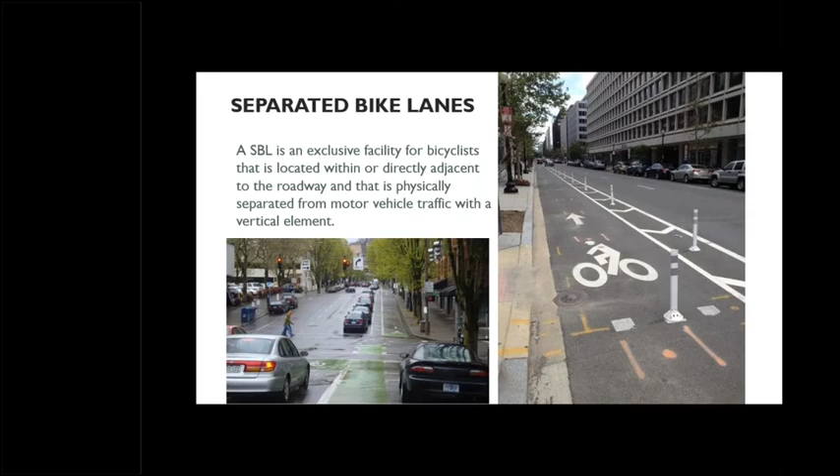Separated bike lanes, like shown here, offer another degree of separation from traffic. It's an exclusive facility for bicyclists located within or directly adjacent to the roadway, physically separated with some type of vertical element. Separated bike lanes are differentiated from standard or buffered bike lanes by this vertical element. They're differentiated from shared use paths by their more proximate relationship to the adjacent roadway, so they're usually adjacent to the actual traffic lane but just have that vertical element introduced.

So these separated bike lanes can really have the best of both worlds—they have similar geometries to bike lanes, but they're fully separated just like shared use paths.

Interest in separated bike lanes is growing in Florida. District 7 has one, another is proposed on Robinson Street in the Orlando area, and this image shows the Cass Street separated bike lane in Tampa. I actually have a project right now contemplating separated bike lanes. It's getting a lot of traction, and the DOT sees it as something we can incorporate into our projects without increasing the typical section by a large amount.

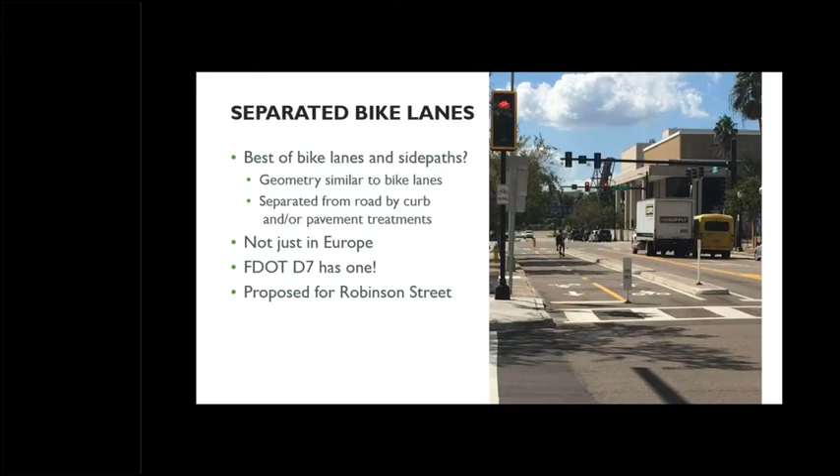So this is an example of a context-based design in action. This is my project, State Road 430 in Daytona Beach, also called Oakridge Boulevard. It's a half-mile stretch of road between the Intracoastal and the Atlantic Ocean.

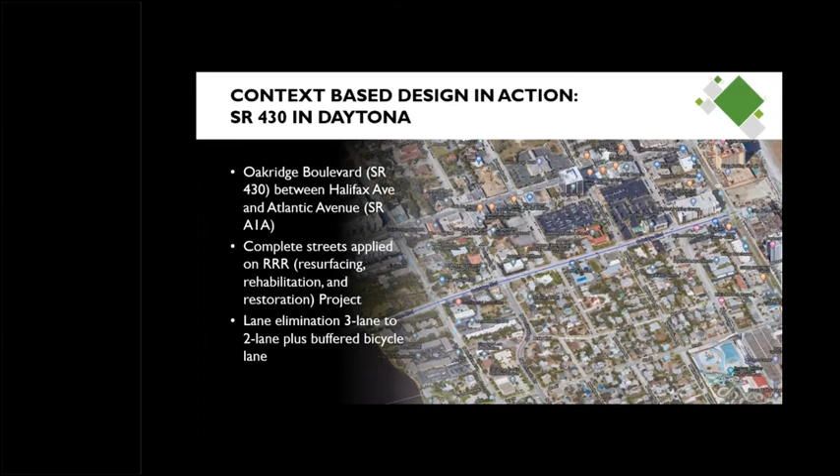This was actually a 3R project, and when we went to the field to review conditions, we realized there were a lot of complete streets elements and context-based design we could introduce into this 3R project without increasing the cost at all. So we ended up doing a lane elimination from 3 lanes down to 2 lanes and adding in a buffered bike lane.

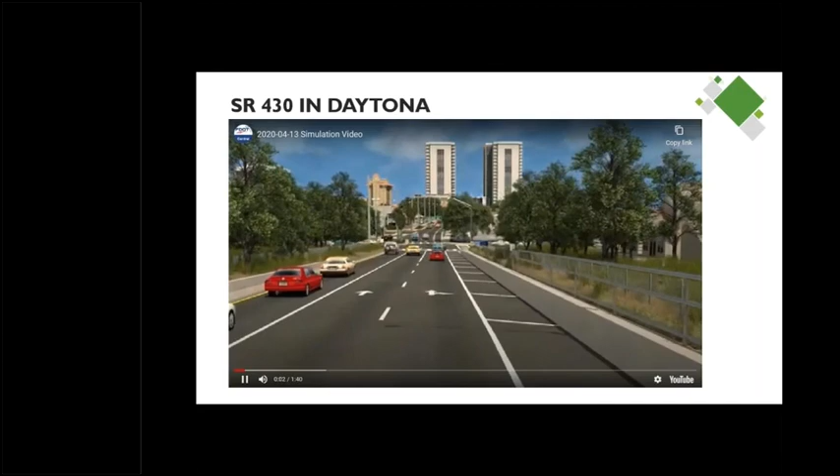Now we're going to show you a video that we created so we could explain the vision to the locals and get buy-in.

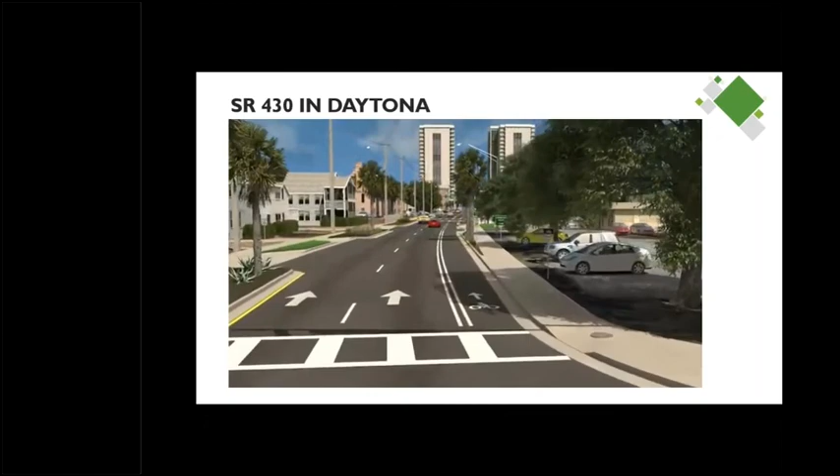This video shows that originally these 3 lanes continued forward. Now we have the leftmost lane dedicated as a left-only lane, and we've introduced a horizontal deflection at this initial intersection. If you're looking forward in this lane, you're actually looking at the sidewalk, but now we have a horizontal deflection to shift over half a lane, and then another curve that we've introduced.

In addition, there was 40 feet of pavement out here originally, and we've reduced that down to 33 feet by shifting in the curb line. If you'll notice on the right-hand side, some of the curb lines may look a little odd—in this picture in the bottom right, you'll have a little bit of a curved island.

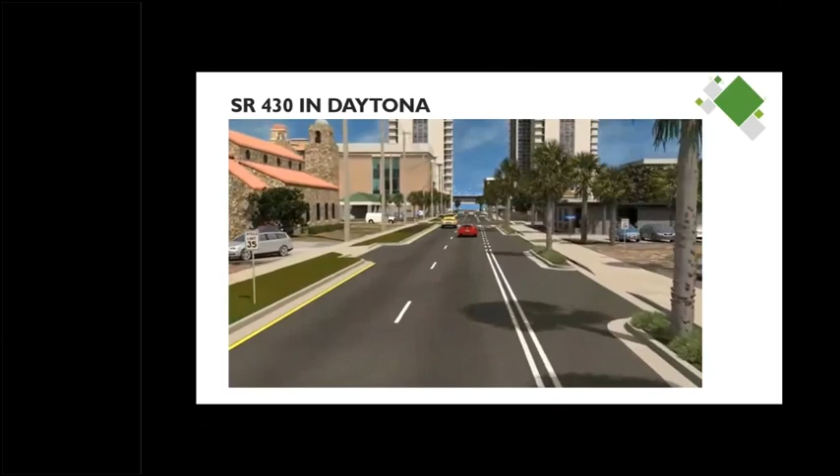We didn't mess with the drainage at all—we just inserted flumes to maintain the existing drainage, which really kept our costs down. We didn't impact any utility owners, so it was a lot cleaner and easier to do the design this way. Another thing you're going to see that we're really proud of is a bike ramp.

So the bike lane originally had ended at A1A. So what we decided to do is we created a bike ramp to be able to give those cyclists an option, whether you want to take the lane or whether you want to get onto a sidewalk that we widened out to 8 feet because of that bike-ped interaction.

You'll also notice landscaping along the entire length of the project. As long as it's a function of the design, DOT can add landscaping into a design project. So as part of the speed reduction that we did in this project from 40 miles per hour down to 35 miles per hour, we integrated landscaping into the design, and that allowed us to pull in those vertical elements closer to the roadway to impact the speed of vehicles traveling through.

So we reduced the width of the roadway. Originally, they were, I believe, 14-foot lanes. We narrowed those down to 11-foot lanes. We eliminated one of the lanes completely and reallocated that space to a buffered bike lane, which is going to introduce some more friction. We added in the landscaping, all those elements together. You really need them all to tie in together to be a useful and functional part of your speed management, which is how we were able to reduce the speed on the roadway.

So as we wrap up, we'd like to hear from you about a context-based design principle that was new to you, surprised you, or that you think could apply to a project you're working on today. So please take a minute and enter one of the 3 context-based design principles into the question box, and from that I will turn it over to Tina.

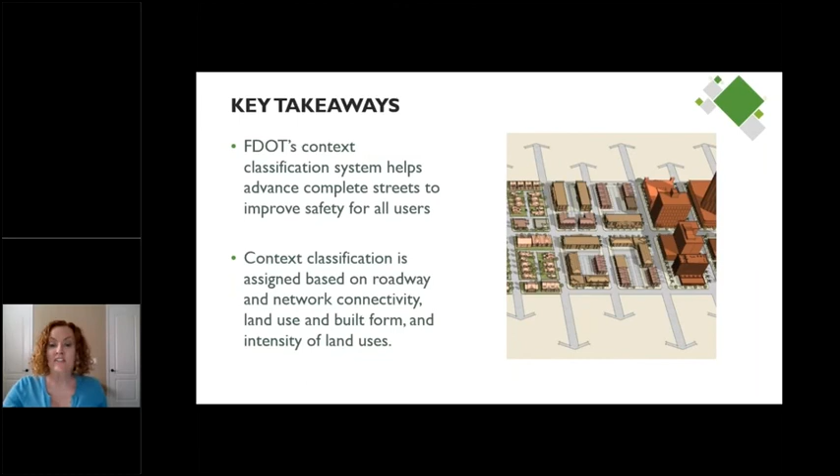You can also use those same measures to work backwards and make conscious decisions about land use and land development code regulations to implement local visions for an area. And we also learned how context classification fits into other FDOT processes and shared a series of context-based design principles that you can apply to your own work.

Not every design principle can be applied to every roadway, but we can use context classification to understand who the users are along each roadway and their needs and challenges, and we can begin to design the right context-based solution for each street. And now we're going to take a couple minutes and answer some of the questions that we have received.

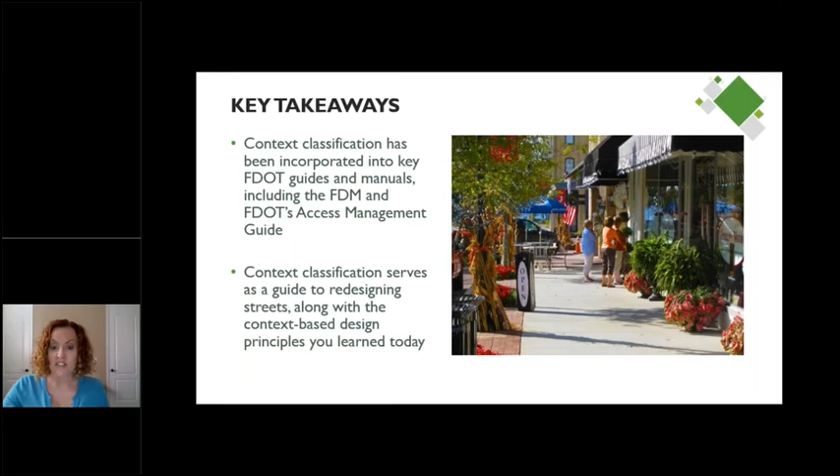Hey, so we have a few questions. It looks like you've already tackled most of them by typing in a response, but was there one that you think could be beneficial for the group to hear?

We have some questions about some of the criteria. There's some folks who are concerned about the FDM shows, for instance, that you can go down to 10-foot lanes in some conditions, and there are some concerns about whether some vehicles are difficult to operate with 10-foot lanes, which is true—transit is the example of that. And so within the FDM, you have to also look at the footnotes that go with the tables. There's a section that says the lanes are 10 feet, but then the footnotes underneath talk about if you're trying to accommodate buses, you may need a larger lane, 11 or 12 feet, based on the vehicle you're trying to work with. Same kind of thing: if it's an area that has over 10% trucks, you wouldn't use a 10-foot lane. So we have tried to accommodate some of those things in the FDM.